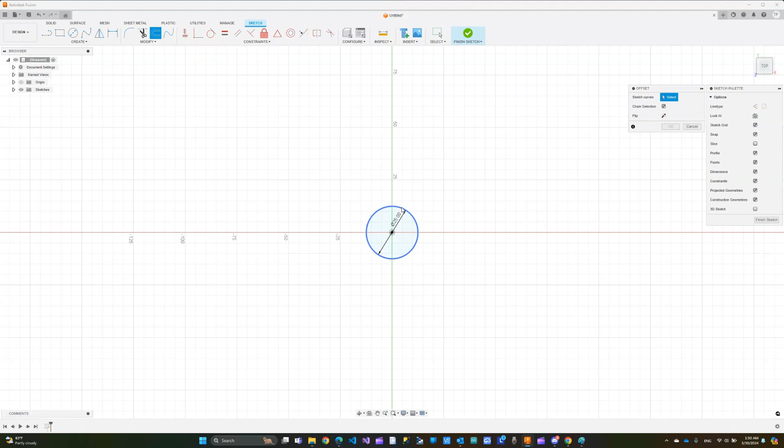Let me throw in a quick sketch here. I'm going to add a circle, then use the offset. What I'm trying to do is make two cylinders, one inside the other. Let me offset this one by negative 0.5. That should do it. Let me click finish sketch and zoom in.

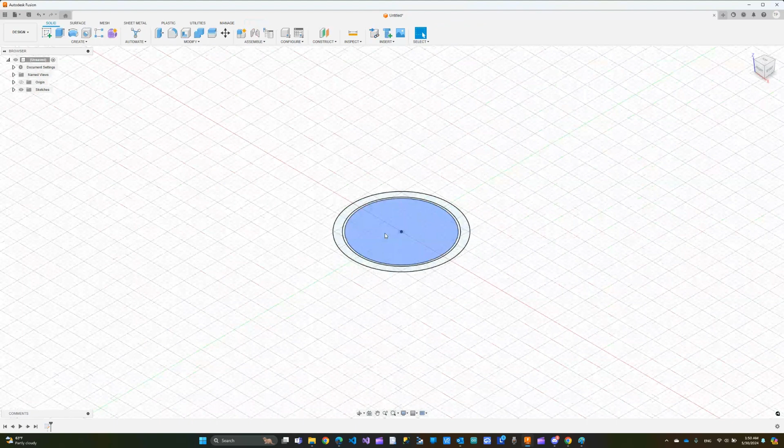I'm going to extrude this by 25. When you extrude, it'll hide the sketch, so let me show the sketch again, and I'm going to extrude the outer one by 20.

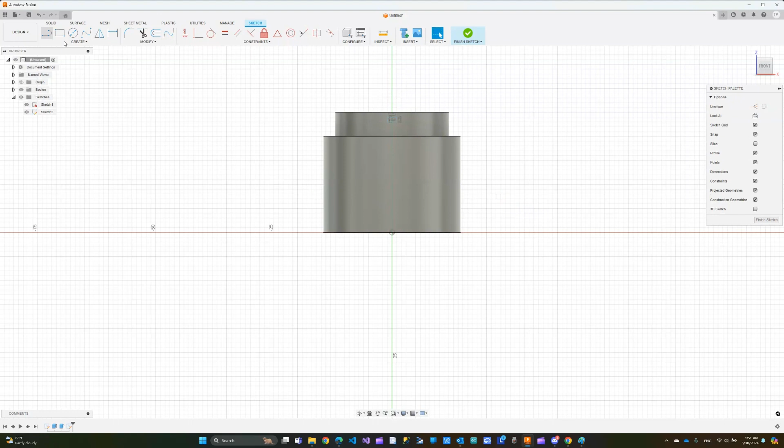Now let me add one more thing here. I'm going to draw another sketch. Let me choose this side and add a rectangle here. I'm just trying to demo this. What I also need is a line, which is going to represent the path.

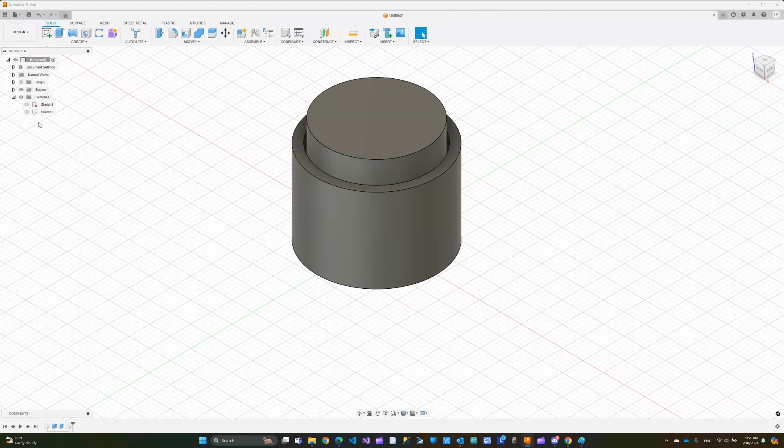Before I confuse you more, let me explain what I'm doing here. I have a cylinder inside another one. You can see here there's the larger one - let me hide my sketches. Now you can see there's a cylinder and another one inside it. If I show this sketch here, and let me hide the first body.

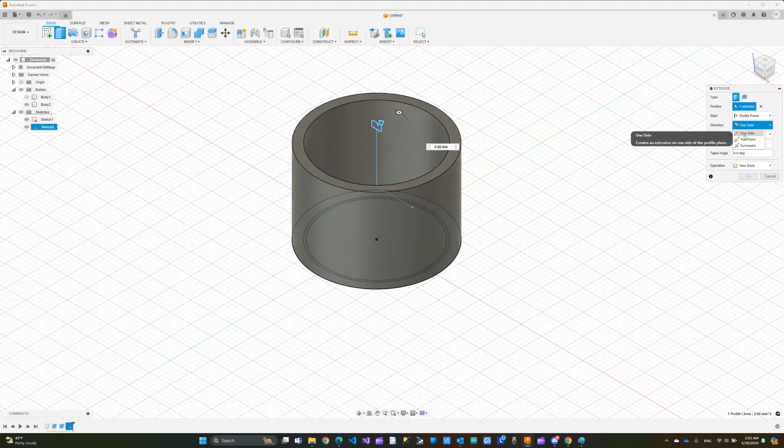Now I can extrude this and let's do both sides. By the way, when you extrude, you can extrude on both sides, so instead of a single side, you can switch the extrude to two sides. Now let's do 20 on this side. Actually, let's try 20 on this side, and on the other side let's do 10. Actually I can just do 5 here. That should be good.

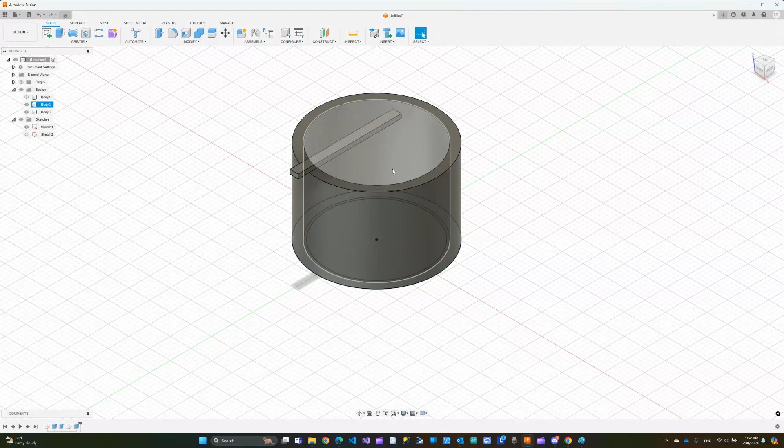And the other line here, if I show you the sketch, this line is going to represent the path that we're going to use for the sweep function. Let's go ahead and show the body one more time. Now this is what we have.

The way sweep works: imagine you have this cylinder, the tiny inner one, and you want it to go inside this outer one. You'd have to make a cut for this knob or this thing that's sticking out. So how would you do that? In this case, you can use the sweep function.

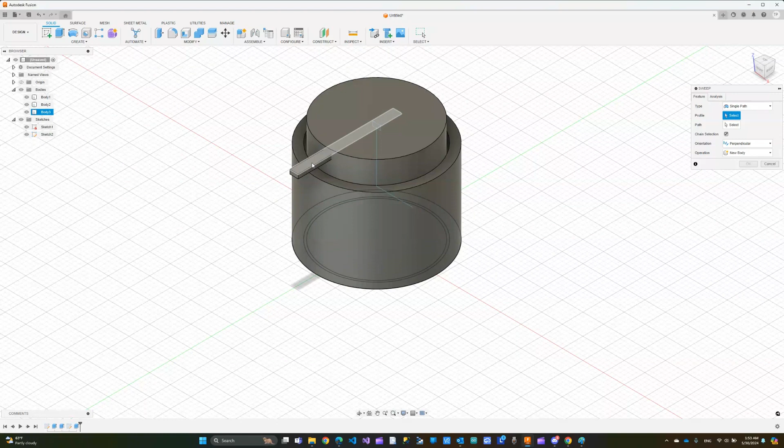So for the sweep function, I'm going to select that, select sweep. Now we need to select the surface - it would be this one here. And I need a path that this surface can follow, so I'm going to choose this line I drew over here for the path. Let me switch here.

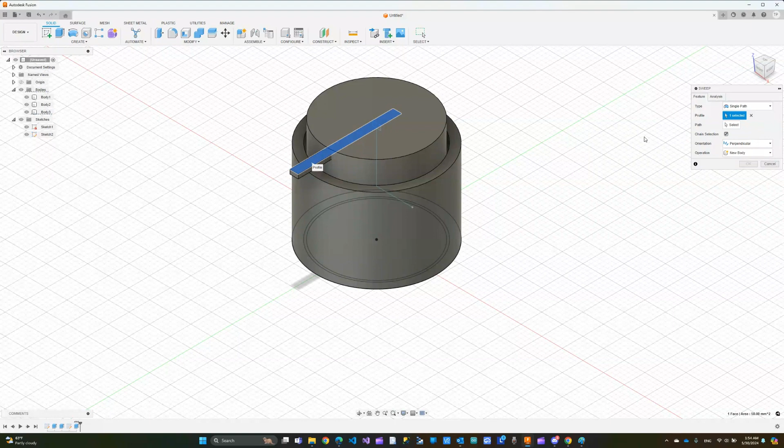You can see there's a sweep menu. I'm going to do a single path, and here I select my profile. Next, I select the path, which is the line. And as you can see, it's already cutting through.

But it's cutting through both bodies. Under here, under object, it says which object you want it to cut through. I'm going to deselect one, so I don't want it to cut through one, and I don't want it to cut through three either. I just want to cut two, which is the outer cylinder.

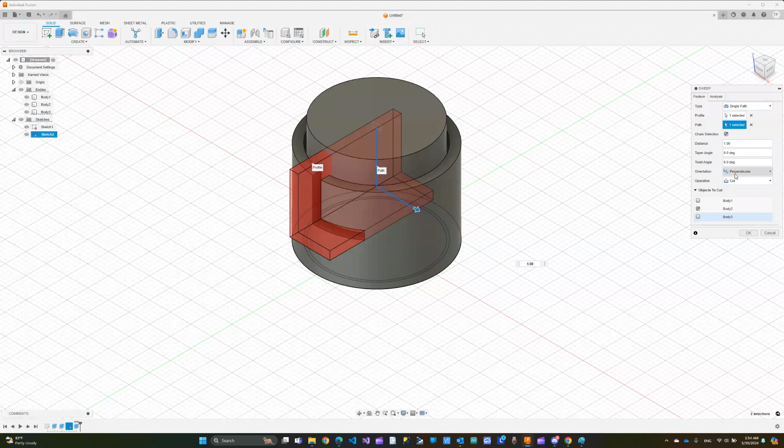Now if I click OK - by the way, there's also a taper angle you can specify, and also a twist angle. Here you can also do the orientation, whether you want it perpendicular or parallel to the path. In this case it wouldn't work as parallel because the line is perpendicular, so we have to do perpendicular.

Let me click OK, and here let me just orbit around this. And you can see we've achieved this cut.

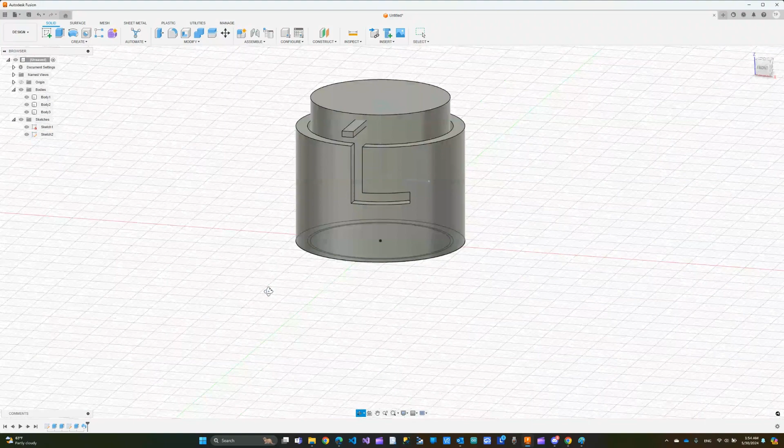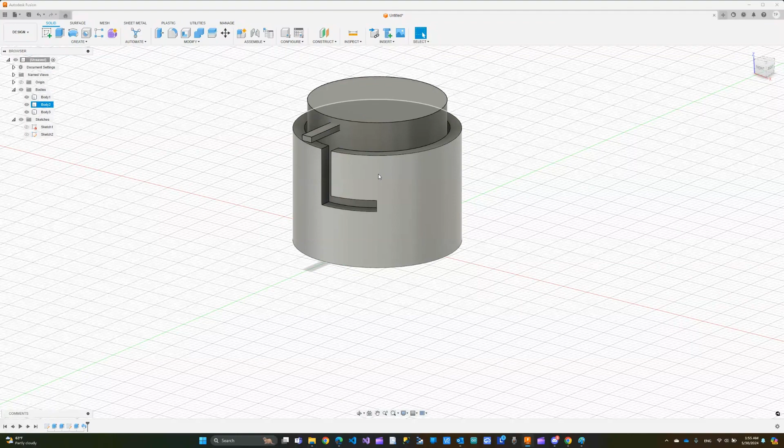Now imagine if I were to push this tiny inner cylinder through - let me do one more thing here, let me just hide my sketches. If I push this cylinder, the inside one, through the larger one outside, it would fit and actually go through it, and you could twist to lock it in, for example. So if you want to design something like that, that's what the sweep function does.